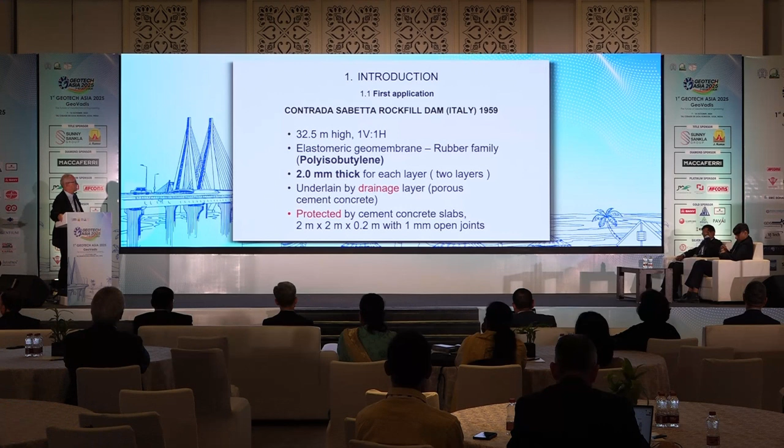As you may know, the first application to a dam was experienced in Italy in 1959 on a rockfill dam 32 meters high, where an elastomeric geomembrane, a polyisobutylene 2 millimeters thick, was applied and protected by cement concrete slabs. This was a very historic application on a quite important slope, 1:1, and after this very historic application, more than 300 dams presently in the world are waterproofed with geomembranes.

Most of them, almost 70%, are embankment dams, the subject of my today's presentation, about 20% on concrete and masonry dams, and the rest are roller compacted concrete dams. These are the statistics from ICOLD, the International Commission on Large Dams.

So I do not spend time on the history of this application. After this very historic application in southern Italy in 1959, a lot of other applications were experienced, like in the United States in 1960, the famous Terzaghi Dam.

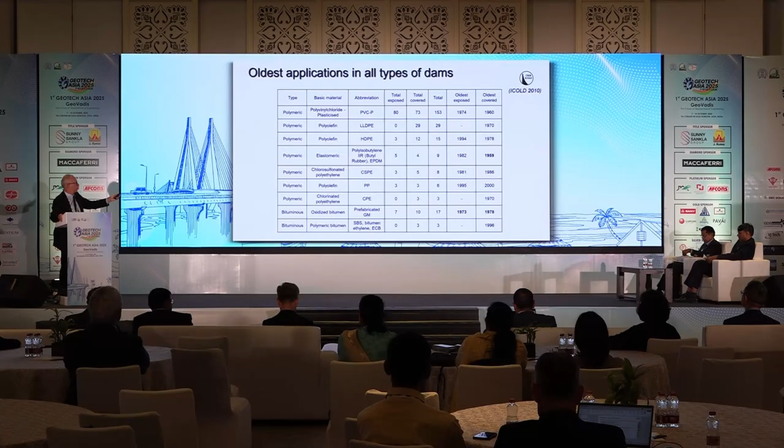Dealing with embankment dams and also reservoirs, my speech today will be only on the upstream slope application, while there are about 10% of applications of geomembranes in dams that are not on the upstream face, but are in the central position in the embankment dams, like in geotechnical engineering zoned embankment dams with a central clay core. This is the same concept, but today I have no time to present this interesting new application on the central location.

The statistics from ICOLD, which are not really updated, date back to about 15 years ago, and most of the applications are now on PVC, polyvinyl chloride geomembrane, which is almost 50%. I will illustrate this in the next slide.

For the new construction, there are two main applications: where the geomembrane is left exposed to atmospheric agents, and another type of application in which the geomembrane is covered or protected by other materials, like in the first case in southern Italy, which was protected by concrete slabs.

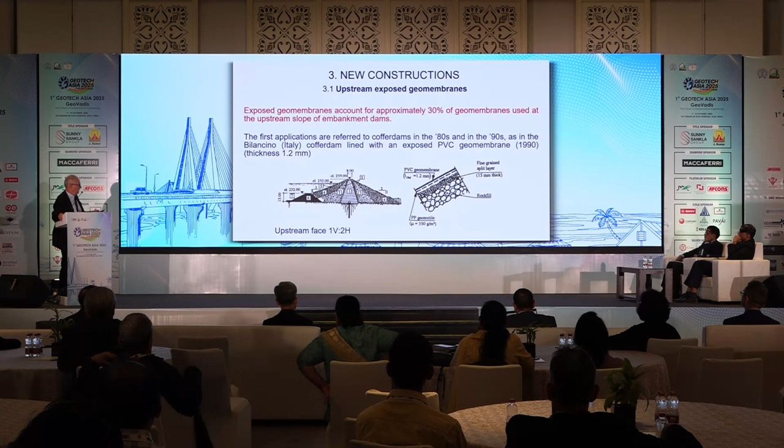This, for instance, is the Bilancino Dam, to protect the city of Florence from flood, in which you could see an embankment dam with a central core and a coffer dam that was protected by a PVC geomembrane.

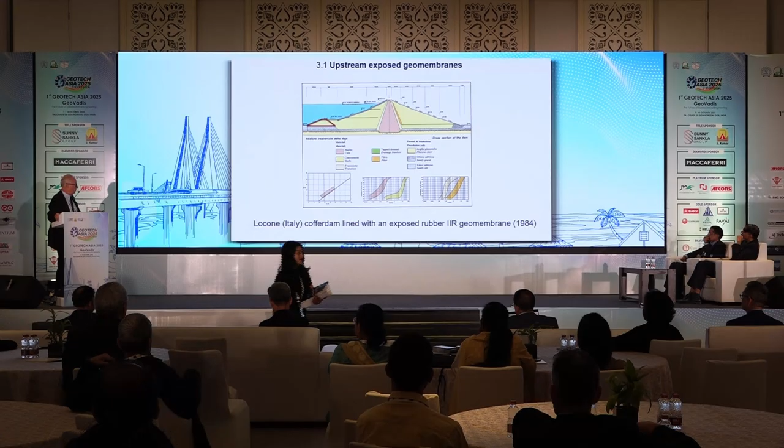More recently, there are a lot of important applications of exposed geomembrane in embankment dams. Here is Cerro Lindo Dam in Peru, less than 20 years ago, with the bituminous geomembrane almost 5 millimeters thick. The dam, about 30 meters high, was applied on a slope of 2 horizontal to 1 vertical.

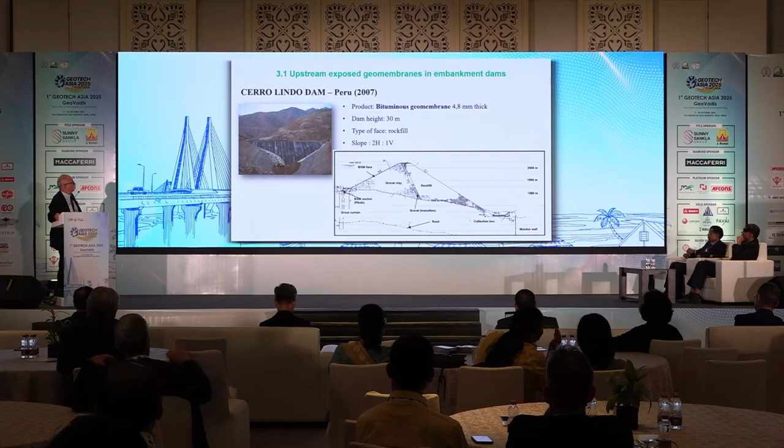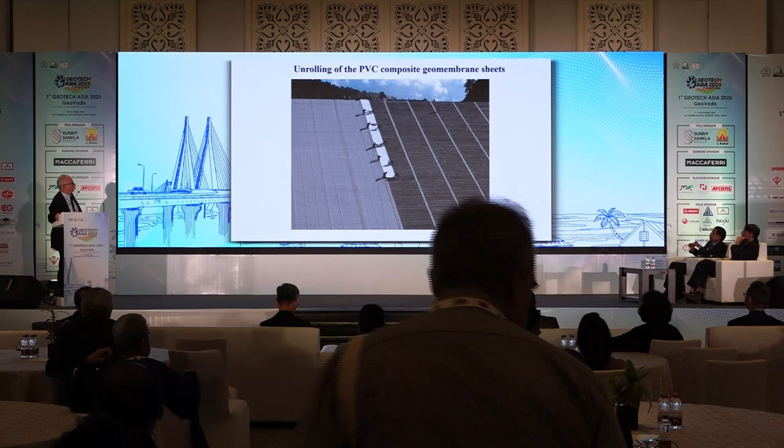This is a case of a reservoir in the United States, in Maryland, in which a bituminous geomembrane more than 5 millimeters thick was applied for a drinking water reservoir. These are the phases of application during installation of the geomembrane itself, and on the right, during service, even in winter time with this exposed geomembrane.

Okay, we have seen some examples, also recent examples, of exposed geomembranes, which cover 30% of applications; 70% of applications are protected, covered geomembrane. So the concept is very simple: to apply concrete elements on top of the geomembrane, or a soil ballast, to protect the geomembrane itself on the upstream side.

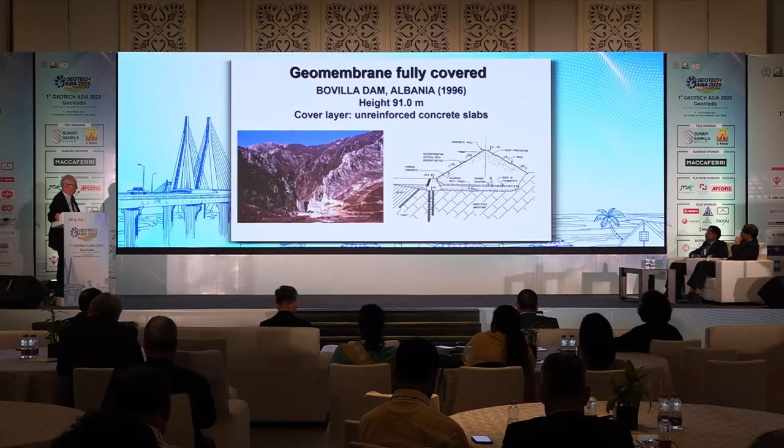This quite important application dates back almost 30 years in Albania, the Bovilla Dam, more than 90 meters high, in which a geomembrane was protected by non-reinforced concrete slabs. You could see here, this resulted in one of the first important applications of this concept.

This is a composite geomembrane, formed in factory, manufactured with a PVC geomembrane 3 millimeters thick, associated in factory with a geotextile of about 700 grams per square meter. The geotextile has a function to protect the geomembrane during application on the support, and in that case the geotextile avoids requiring heavy surface preparation of the support.

This is the application of unreinforced concrete slabs over the composite geomembranes in Albania; an extra layer of polypropylene geotextile, about 800 grams per square meter, was applied. You could see the casting of non-reinforced concrete slabs by an alternating method. It's important to note that this system allows a very fast application, about 1 month for a dam of more than 90-meter elevation.

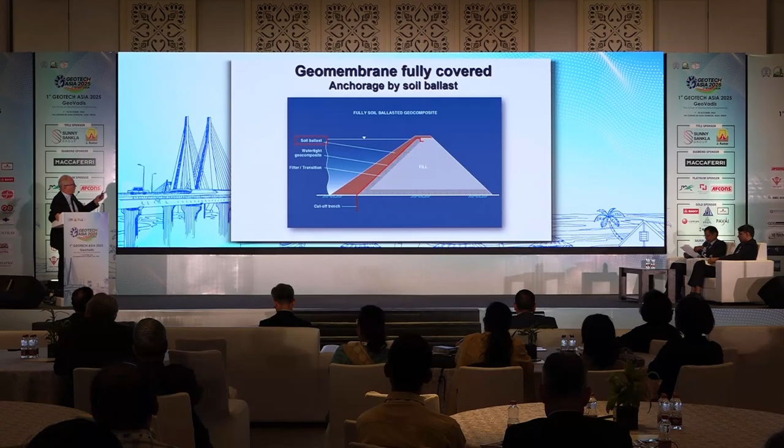A very important historic application was realized by the United States Bureau of Reclamation in the early 80s for this pumping storage reservoir in Colorado, Mount Elbert, in which, for the first time in the United States, a geomembrane was applied, only 0.5 millimeters thick, and protected by a wrap with gravel. This marks an important application because after this reservoir, the installation of the geomembrane marked a turning point also in the United States.

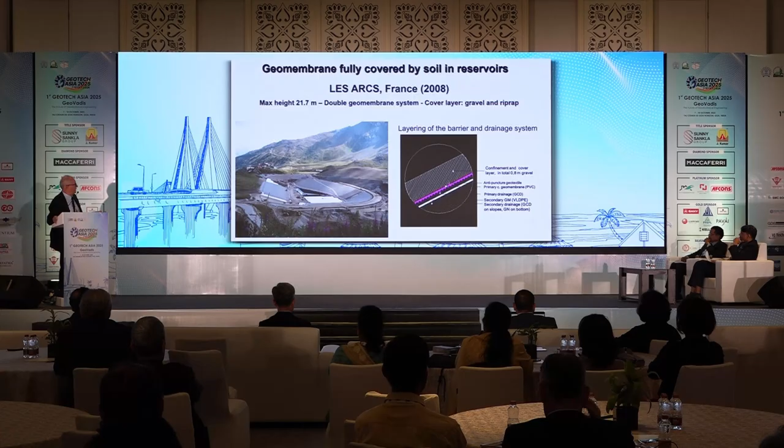A more recent application of a more complex system is this reservoir in France with a double geomembrane system. I will not spend time explaining all the various layers of geosynthetics used in this application in France, just showing the final placement of the gravel cover layer over the entire geosynthetic system.

I have no time today to spend on this in my presentation, but yesterday there was an interesting debate organized by the Federation of International Geoengineering Societies, FedIGS, on the concept of using geotechnical engineering for climate change. In the Alps, and also in other countries, not only in Europe, we have seen in recent years a lot of geosynthetic applications to protect reservoirs used for allocating water for snow-making applications in the Alps.

Finally, concerning the application of geomembranes, not only in new construction but also in rehabilitation, just 3 examples. This is the application of an exposed geomembrane done about 20 years ago on a cement concrete face rockfill dam, particularly in this dam in Norway, where there were important leakage in the concrete face.

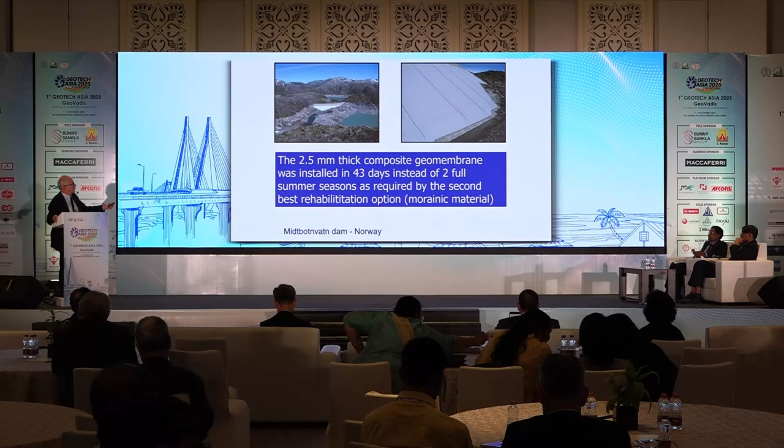A composite geomembrane 2.5 millimeter thick was installed in 1 month and a half, instead of 2 full summer seasons that were required by the second best rehabilitation option using morainic materials. You could see here some particularly attractive photos of the exposed geomembrane in presence of snow and ice during the winter season. But the most important result was that this type of application involved a decrease of the leakage from 440 liters per second to 1.5 liters per second.

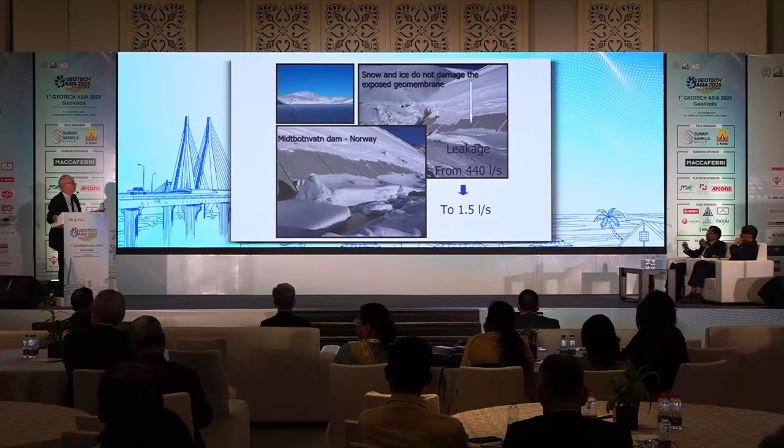The same concept could be applied to bituminous concrete face rockfill dams, and also to stone masonry dams. I'd like to show you a very important application in your country, at Kadamparai in India. It was a masonry dam in which a system involving non-woven geotextile and composite geomembrane, applied 20 years ago, allowed, after the repair, to reduce the leakage from about 40,000 liters per minute to 30 liters per minute.

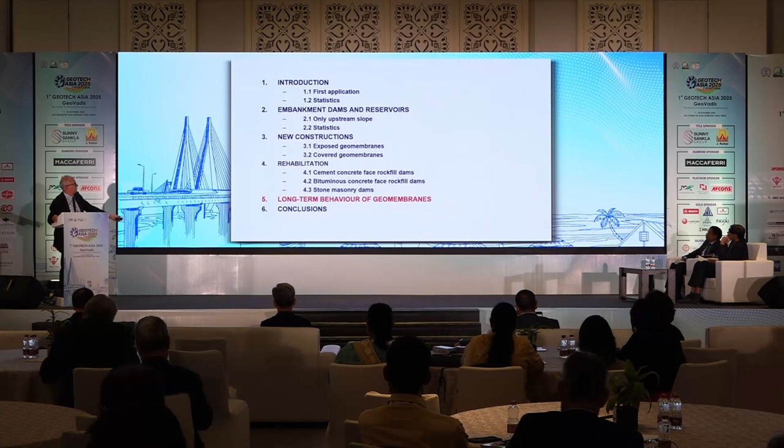So finally, some consideration on long-term behavior of geomembranes. At the Contrada Sabetta rockfill dam, the removal of concrete protective slabs was done in '98, after almost 40 years of application, and we discovered no variation of the mechanical and hydraulic characteristics of these geomembranes after almost 40 years of application.

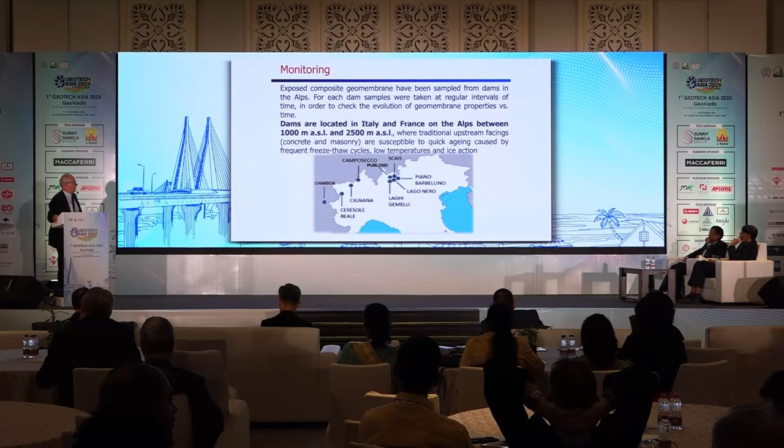A more important research has been done recently by our laboratory on dams located in Italy and France, in the Alps, between 1,000 meter and 2,500 meter elevation. These dams are concrete and masonry dams in which the geomembrane is completely exposed to atmospheric agents.

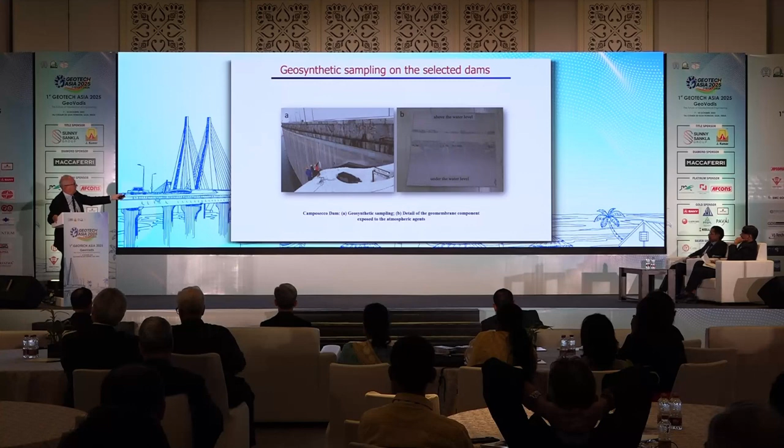You could find the result of this experiment in the written contribution. Of course, our policy is to monitor the dams by visual inspection, but also to take samplings from the dams in order to ascertain their properties over time through a number of tests. The most significant test for this type of dam is the variation of plasticizer content, which could allow us, through some model, to detect the residual life of these geomembrane dams.

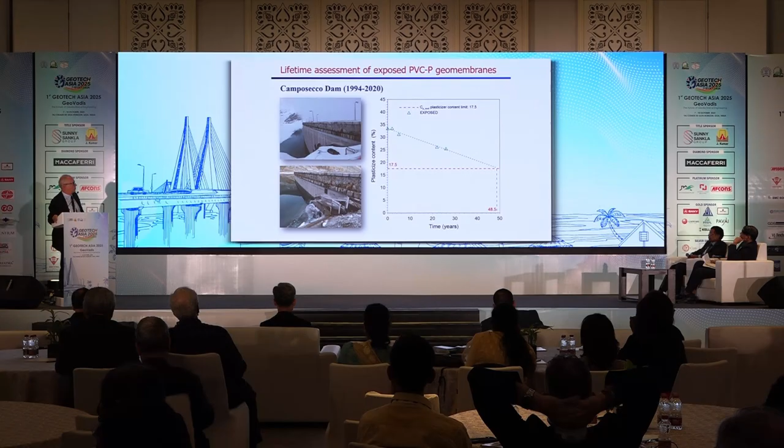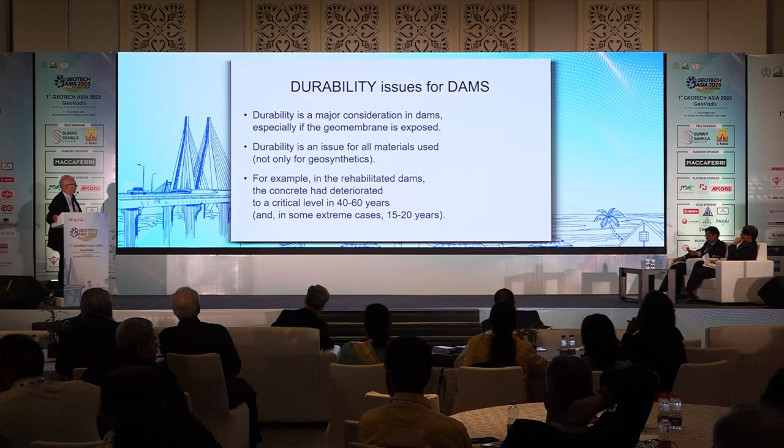So some conclusions: we have seen that most applications of geomembranes are in embankment dams. Durability is a major consideration for these dams, particularly if the geomembranes are exposed. Durability is of course an issue for all materials used in dams, not only for geosynthetics. In dams, unprotected geosynthetics are exposed to harsh conditions, and to ensure durability, particularly in exposed condition, the geosynthetics must be carefully selected and regularly monitored, visually inspected, and to check durability, my suggestion is that the geosynthetic could also be tested periodically.

So I'm available for any questions during the breaks, and thank you very much for your attention, also on behalf of my colleagues.

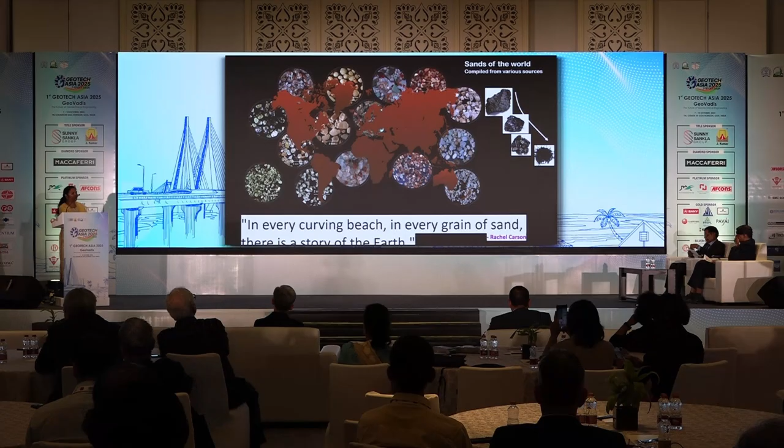In this slide, I am showing you the collection of sand particles from different parts of the world. It's a very beautiful story of the Earth, where there is continuous upcycling and recycling of sand happening. We have these big mountains which get eroded, particles break, they get transported into rivers, and these sediments consolidate, get cemented, and then they are uplifted to again form mountains. At places where we have divergent boundaries, there is continuous lithosphere formation. The igneous rocks are formed from the magma which is coming up, and these again are upcycled into mountains, they get eroded. This is a continuous story of every sand particle that we see on the Earth's face.

You'll be very surprised to know that each sand particle has its own signature shape and size. In the infinite number of sand particles available in different sand beaches and river banks, no single sand particle is alike. That makes us very curious about how these sand particle shapes and sizes affect our macroscopic phenomena like liquefaction.

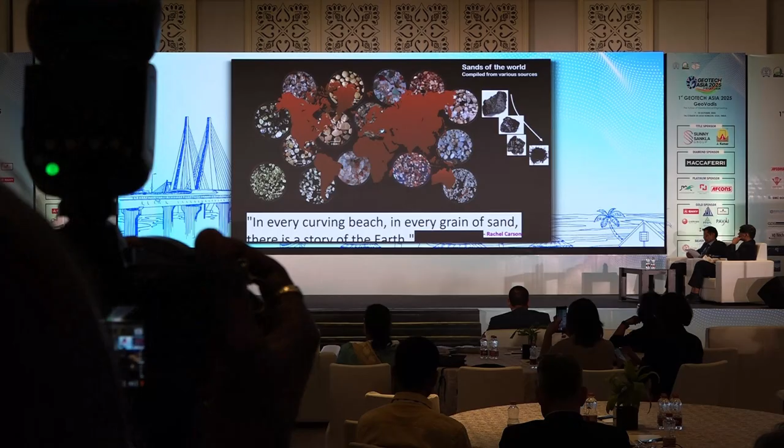As we all know, the particle size and shape and their effects on the shear strength, particle dynamics, density, packing, fabric, overall compressibility, porosity, permeability, these are all well established in literature. But there is no quantification for the effect of particle shape and size on phenomena like liquefaction.

For example, we've been adopting this sieve analysis in our designs. We only talk in qualitative terms. We take sieves which have square openings and pass over soils which do not have a definite shape, and then we only get one-dimensional information. We rely on this shape, and we have no clue of the size and shape of the particles. All our designs only talk about D10, D60 and effective grain size, which has definitely no relation with macroscopic phenomena. So we are making so much of empirical assumptions here, which I am trying to break through this microscopic work.

To put forth some ideas, this is about particle kinematics and how they are affected by the particle shape. In very simple intuitive terms we can understand: if you have rounded particles, their point of contact is one, they can contact at only one point. Whereas if you have an irregular particle, you can have multiple contacts. So this changes the way they interact with each other, whether they roll on each other, they interlock with each other, or they are easy to separate, or it is hard to separate.

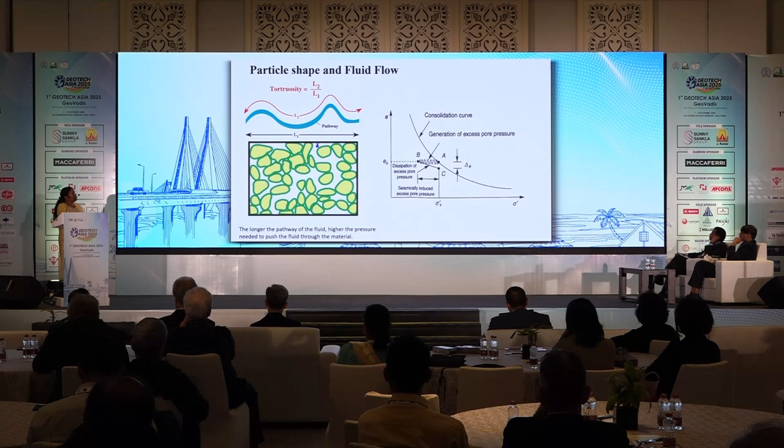If we have a soil particle falling above the CVR line, we call it loose soil. If you subject it to undrained condition, it will reach the critical void ratio line by developing positive pore water pressures. If you subject the same soil to drained shearing, it actually reduces its void ratio because it gets compressed and reaches the critical void ratio.

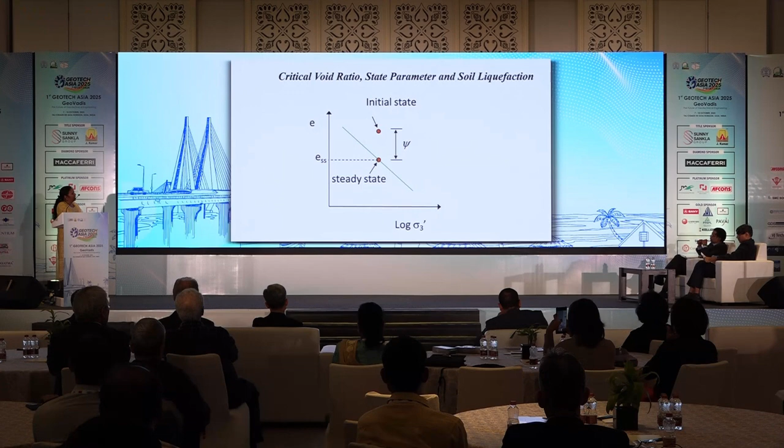Now with this background, we did densification tests on different binary soils, with rounded pebbles and angular gravel particles mixed with fines defined in terms of sand and fine sand. We compacted them and plotted the minimum and maximum void ratio for pebbles and gravels. Very interesting - when you have rounded particles like pebbles, with just 20% fines you reach maximum density, whereas in the case of gravels, which are subangular...

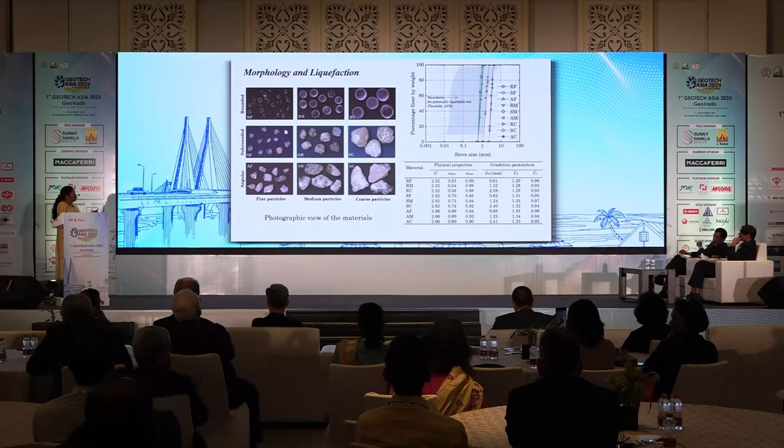For the micro-CT analysis, we fill these soils in acrylic tubes and we can precisely quantify the size and shape of the particles. Further, we also use optical profilometry to understand the roughness.

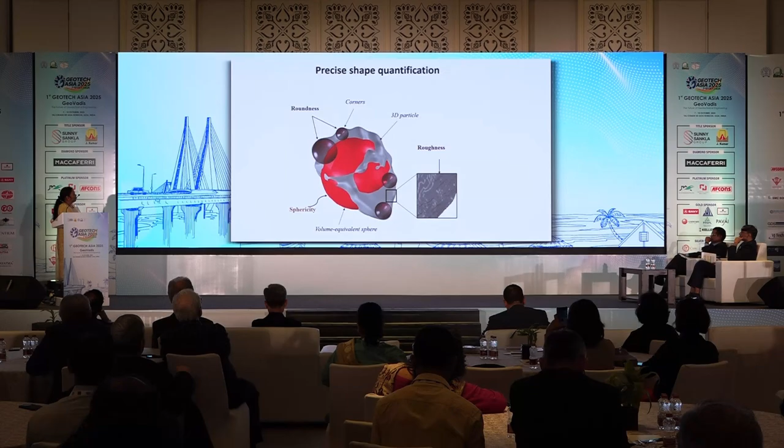Now we do this size and shape quantification on the scanned particles. We move or rotate the particle so that its principal axes remain the main axes X, Y, Z, and then do the volume equivalent sphere generation. We do spherical harmonic analysis to understand the convexity, and then precisely regenerate the particle mathematically so that you can get all the shape parameters from this particle.

I am only explaining this for a single particle. You do this for hundreds of particles together, and then generate the macroscopic or morphological descriptors known as sphericity, angularity, and so on. Now that you have the information, you go for optical profilometry to understand the microscopic parameter, which is roughness.

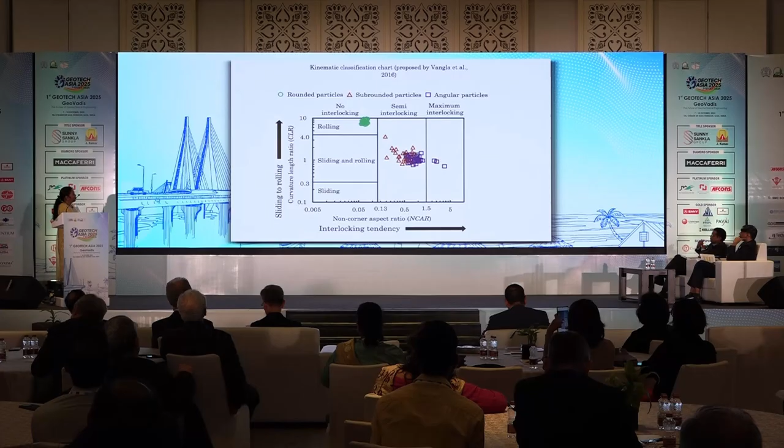Once you quantify these parameters precisely, you put them in a kinematic chart. This chart was developed by my students, Nimisha and Prashant Vangla, where based on size and shape, you can place the particles in no interlocking, semi-interlocking, and maximum interlocking zones. Based on this, you understand the kinematics of particles.

Now, a very interesting aspect of this is that when you separate size and shape, particles of the same shape, irrespective of their size, exhibit the same critical state line and the same phase transformation. Phase transformation is: if you have loose sand and you subject it to shearing, it develops positive pore water pressure, the mean effective stress reduces, and it reaches the critical state line.

It actually contracts and liquefies. If you have a dense sand, it dilates and never liquefies. But if you have a medium dense sand, there is a point at which it moves from contractive style to dilative style, which we call phase transformation.

Irrespective of the grain size, particles of different shape matter. If your particle shape is different, your critical state line is different. So here we understand that compared to grain size effects, grain shape effects rule soil liquefaction.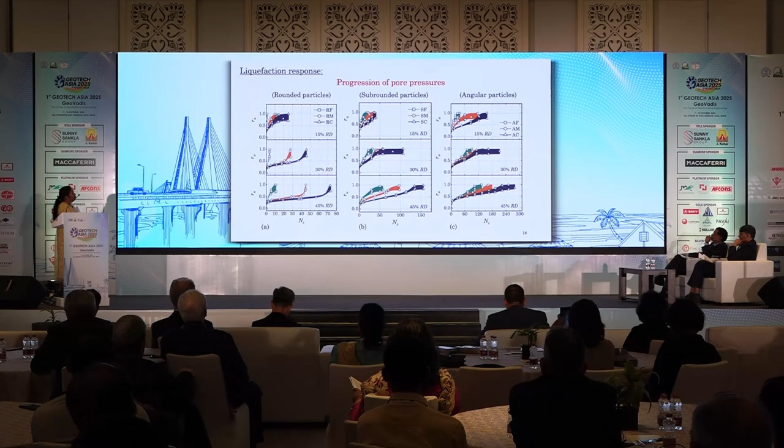A rounded coarse sand liquefies within 25 cycles, whereas angular coarse sand stays up to 150 cycles without getting liquefied. Similarly, the rounded particles quickly move towards zero shear stress state, whereas the angular particles take more time to reach the zero shear stress state.

When you understand the stress strain response, the hysteresis loop gets widened very quickly for the rounded sand. It takes a large number of cyclic stress cycles to induce liquefaction in angular particles.

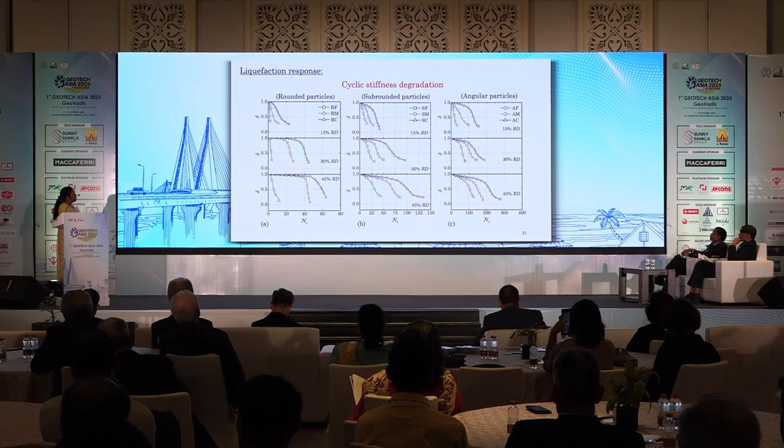The cyclic stress stiffness degradation is also very quick for rounded particles, and it gets delayed in case of angularity. The strain energy needed to cause liquefaction is also very high compared to rounded sand, in angular sand particles.

So if you see the role of grain size and grain shape, which is summarized here, in essence we know that grain shape rules the liquefaction behavior of sands more than grain size, which we have been believing, that smaller fine particles liquefy quickly compared to the bigger sand particles.

Now you combine the grain size and shape effects to ultimately give an understanding of the field level liquefaction resistance, which we call cyclic resistance ratio. So if you plot effective grain size and regularity, which is the average of sphericity and roundness, we can plot the cyclic resistance ratio for different sizes and shapes, which tells us that by knowing the grain size and shape parameters, we can understand the cyclic resistance ratio.

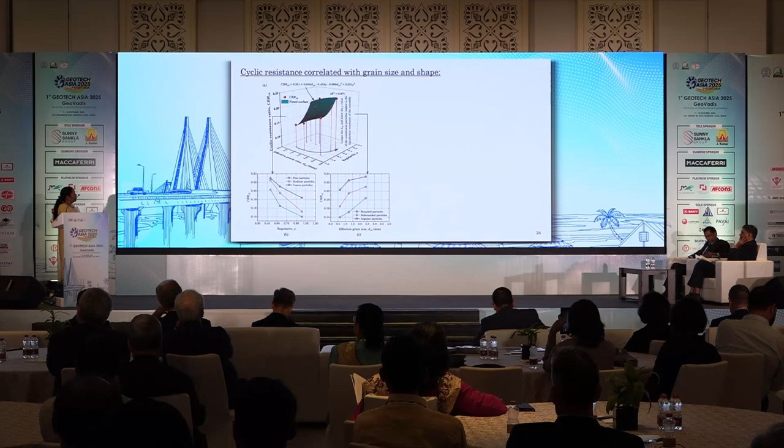Once we have the cyclic resistance ratio, for any given earthquake, the seismic demand is defined in terms of cyclic stress ratio, and the ratio of cyclic resistance ratio to cyclic stress ratio gives you the factor of safety against liquefaction. This is the contribution of grain size and shape to field level liquefaction, which we verified and confirmed.

The reason behind this behavior is very simple. When you have smaller particles, from the cubic packing, which is very loose, to hexagonal packing, which is very dense, moving from this state to that state needs very minimal change in deformation, just a little movement. If your grain size is big, you need a lot more deformation to move from cubic packing to hexagonal packing.

When it comes to grain shape effects, if you have rounded particles, there is a single point of contact, so it's easy for the fluid to separate these particles. In case of irregular particles, the fluid will enter between these grains and separate and dismantle all these contacts. It takes far more energy, and that's why these particles are very resistant to liquefaction.

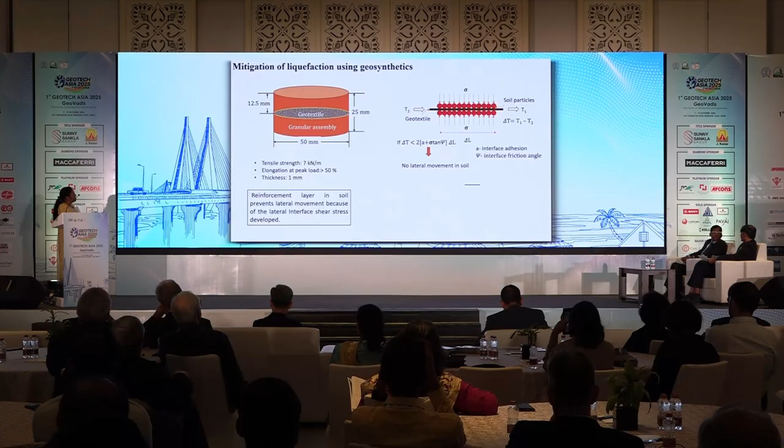Now, about mitigation of liquefaction very quickly, we also try to understand the effect of grain size and shape on liquefaction mitigation. For example, if you put a single geotextile layer between the specimen, exactly at mid-height, and try to understand the liquefaction response of this specimen with different particle sizes and shapes.

What we understood is, when you put the reinforcement, we used a non-woven geotextile which is highly compressible. When you apply the cyclic simple shear, interstitial pressures develop within the thickness of the geotextile, which reduce the pore pressure progression. That is why all reinforced specimens are more resistant to liquefaction, but the resistance increases with grain size and increases more with grain irregularity.

It's very heavily dependent on the grain shape. You can see that the rounded particles could only move from 4 cycles to 9 cycles with an inclusion of one layer of reinforcement, whereas it moved from 76 cycles to 150 cycles with angular particles. So the beneficial effects of reinforcement are more pronounced in case of irregular particles.

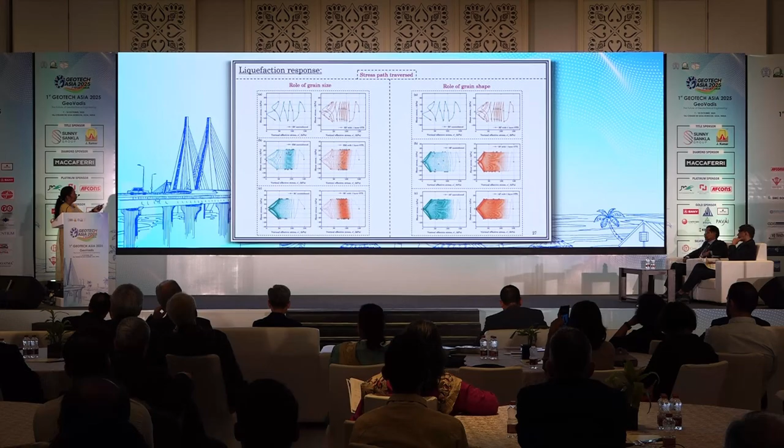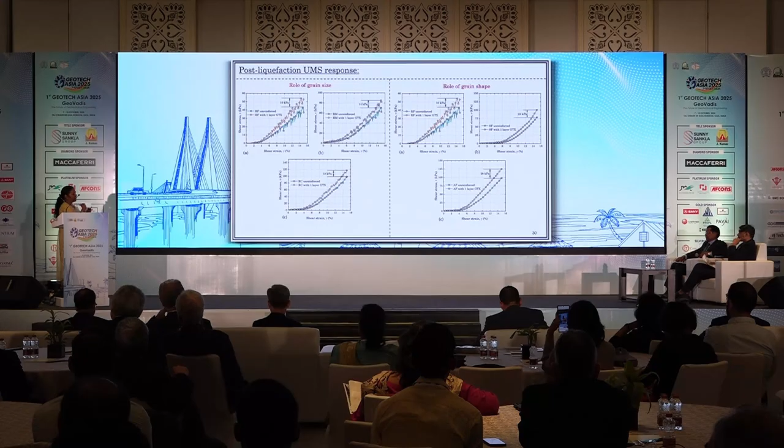The same thing is shown in terms of the role of grain size and shape and the stress path traversed, and the widening of hysteresis loops is very quick in case of rounded particles which are reinforced, compared to angular particles with reinforcement. Similarly, cyclic stiffness degradation is very slow when you have angular particles, and post-liquefaction strength gain is very quick in angular particles compared to rounded particles.

To understand the governing mechanism, we also did the interface shear test, and the interface shear strength can be directly correlated to the increase in liquefaction resistance when you have this layer of geotextile. This summarizes the overall influence of grain size and shape in reinforced sands. You can actually take regularity, angularity, and other parameters like non-corner aspect ratio and curvature.

Modifications were done and tested at a bigger scale, full-scale test as well, where the governing mechanism here is that rounded particles easily roll on the geotextile layer. When you have subangular and angular particles, instead of rolling, they interlock through the material, which creates much better adhesion and interfacial friction, which is the reason for the increase in liquefaction resistance.

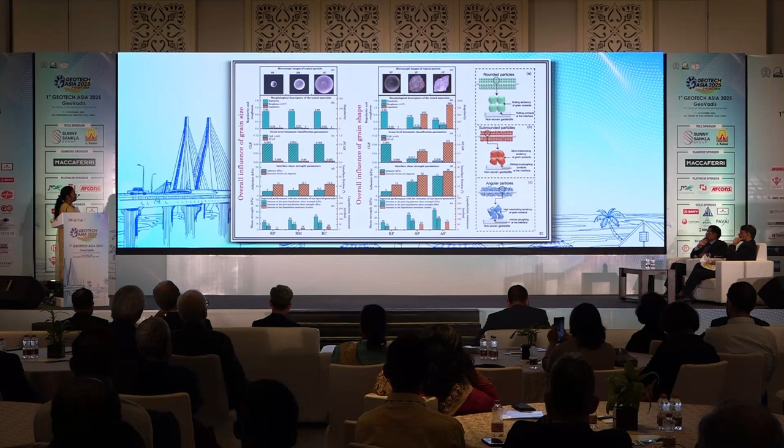Now what is going on in this field in my research is, we are acquiring a big micro-CT which can scan almost 300 mm by 600 mm specimens, and we can do this before cyclic testing in situ. We are also working on 3D printed particles so that we can play around with size and shape and get more clarity on the flow through particles of different shapes.

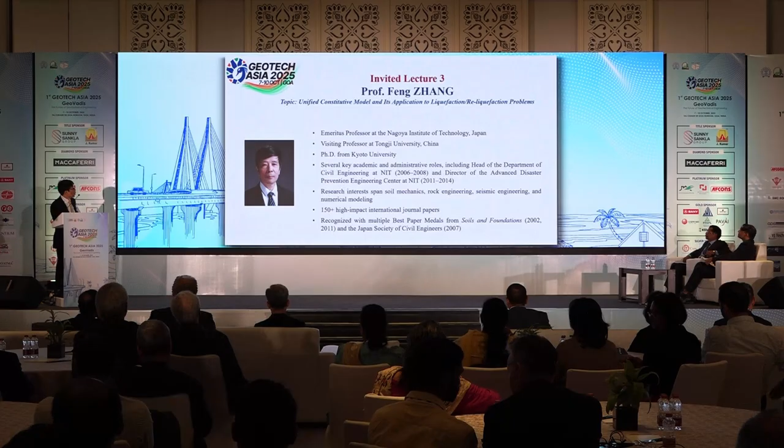So he is also going to speak on the liquefaction aspects. Thank you, Mr. Chairman. The topic of my talk is the unified model and its application to liquefaction. My main focus is on the constitutive model, and I will briefly introduce its applications.

Two parts of my talk: the unified description of soft soil. Sometimes we always consider what is the most influential factor on the mechanical behavior of soil, and three are the most important. One is over-consolidation, or sometimes we call it density.

The second is the structure, where the soil is disturbed, undisturbed, or naturally deposited soil. And the third one is anisotropy - here we mainly consider stress-induced anisotropy.

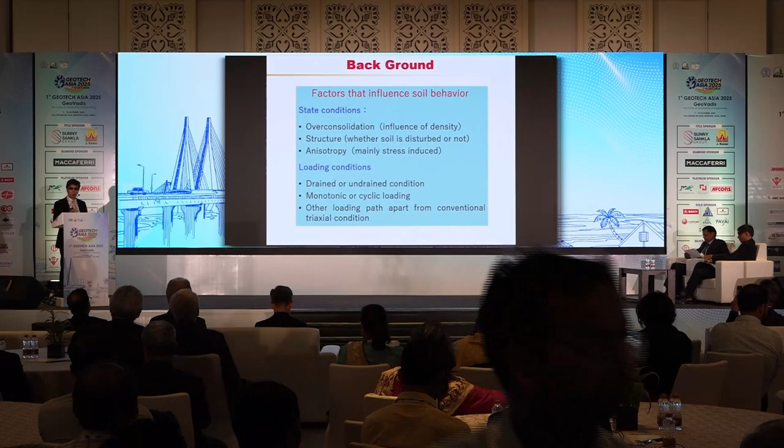The other condition that influences soil behavior is dependent on the external condition, which we call drained or undrained - for soil, undrained or drained is totally different. Monotonic or cyclic loadings are sometimes always contributing, and people used to divide these two different loads for different descriptions. And of course there are other loading paths apart from conventional conditions, so true triaxial conditions, or coaxial and non-coaxial behavior plasticity, etc. But mainly we focus on three major influences.

So if we consider here, I just focus on the sand. For loose sand, or medium dense sand, or dense sand, the soil behavior is quite different.

And also for undrained or drained behavior is also different. The purpose of the research is to describe the sand under different loadings and under different densities, the naturally deposited soil or undisturbed soil, and also the experienced stress history, or what we can say, the stress-induced anisotropy.

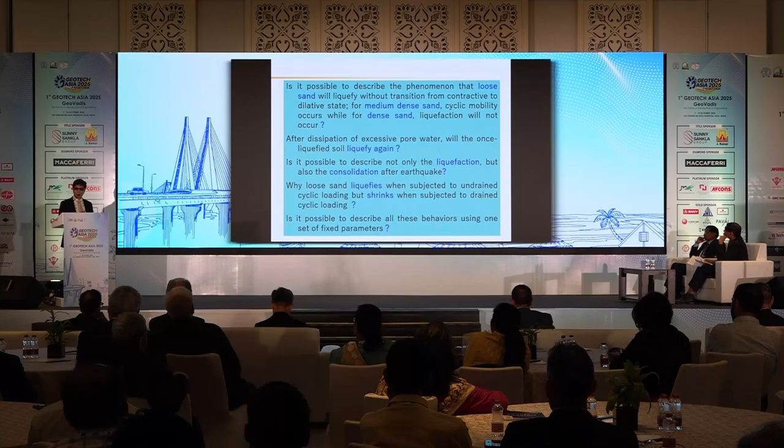So why should we do that? A very simple question is, why would loose sand liquefy? But for dense sand, it doesn't liquefy. And also we observed a very interesting behavior, that during the 2011 Great East Japan earthquake, we find the main shock, the sand didn't liquefy, but the aftershock, much less, did liquefy. Why did such peculiar behavior happen?

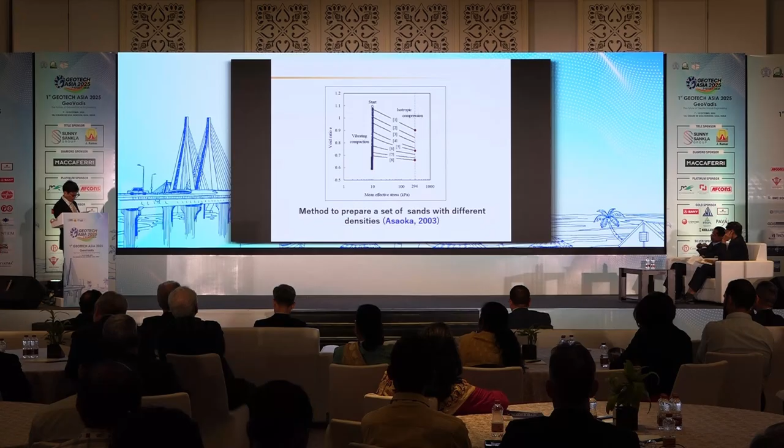So here we prepare a set of sand with different densities. The interesting thing was invented by Professor Asaoka of Nagoya University, using isotropic consolidation and vibration loadings. We start from the same loose sand density, and with different loading paths, we can get a set of sand with different densities. And then we apply the load with undrained conditions and drained conditions.

Here I should emphasize, this is not experimental result, but the numerical result calculated by the constitutive model. I propose we call it the unified model for sand. It is quite easy for you to understand.

For undrained conditions, loose sands show flow liquefaction, static flow liquefaction, phase transition. For dense sand, it looks almost like a linear increase. For very dense sand, this is the effective stress path, and this is the stress-strain relation, and also in the e-log P plot, for undrained conditions, they all move toward and converge to the critical state.

And for drained conditions, dense sand shows strong strain softening and shear dilatancy, but loose sand just shows negative dilation, moving gradually from soft to dense. And also you can find, if we look at sands starting at different points, they finally converge at the critical state to the same point. That means the sand behaves the same way, just under different conditions. However, when you shear them to the critical state, they will move to the same destination. That means the sand under undrained and drained conditions describes a unique state.

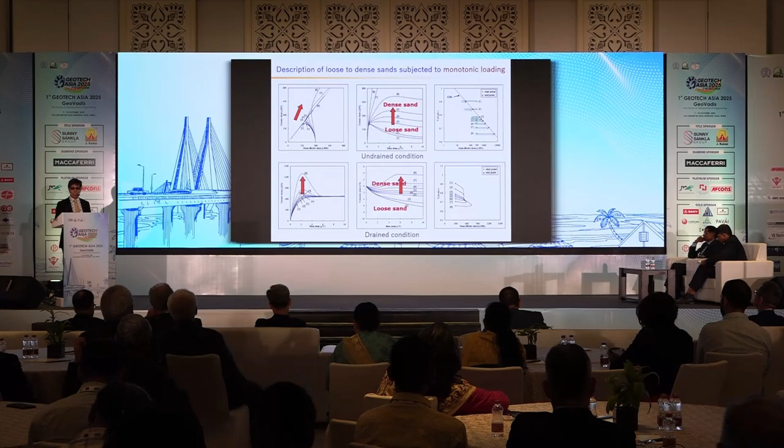But I should emphasize this constitutive model only uses 8 parameters, among which 5 are totally the same as critical state soil Cam-clay models. And the other 3 parameters just control 3 key issues: the evolution of density, the evolution of structure, meaning the decomposition of natural structure, and the stress-induced anisotropy. So you can find, in this way, sand with different densities, subject to different loads under different conditions, can all be modeled using one set of parameters without changing any material values.

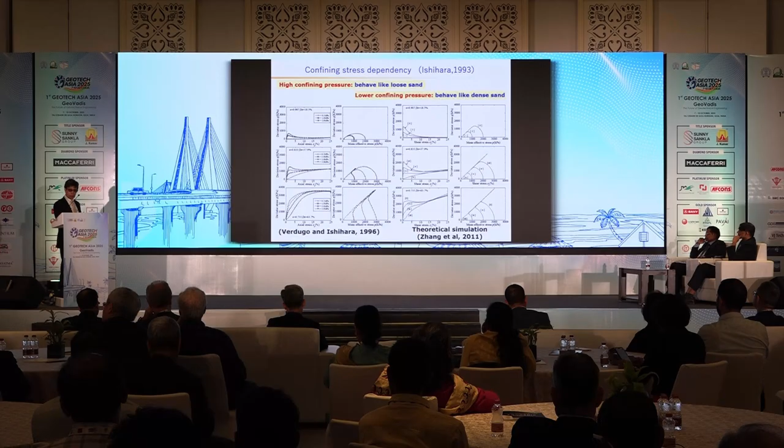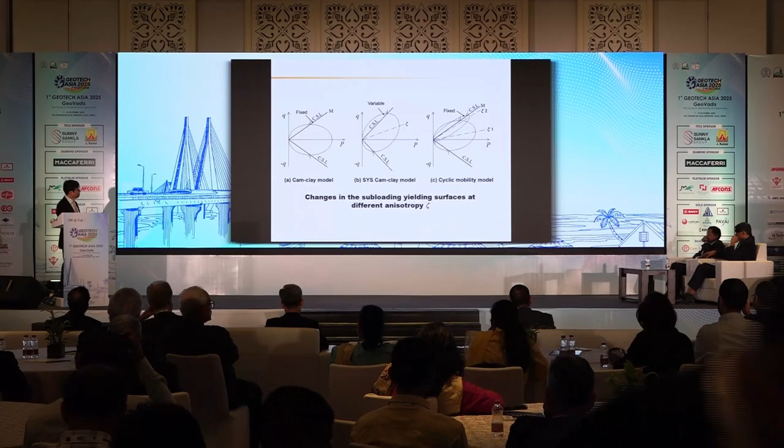I don't have enough time to describe the constitutive model in detail. We use the subloading concept and superloading concept—those familiar with subloading know it is physically the same as the bounding surface concept. This is our constitutive model, using the same concept but very clearly with only 8 parameters, a yielding surface with 3 new evolution equations, and it's a finite deformation scheme.

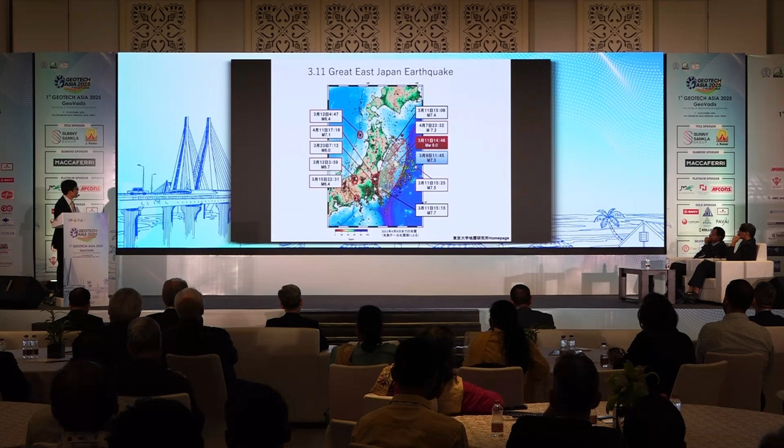With 5 minutes, 2 minutes left, okay, I'll just show you a very interesting behavior since I think I have enough time.

For instance, in the main shock, the liquefaction area is very limited. However, in the second shock, the aftershock, the whole area liquefied—very serious.

I don't have enough time, but this is in 3D. I'll just show you a very interesting pass.

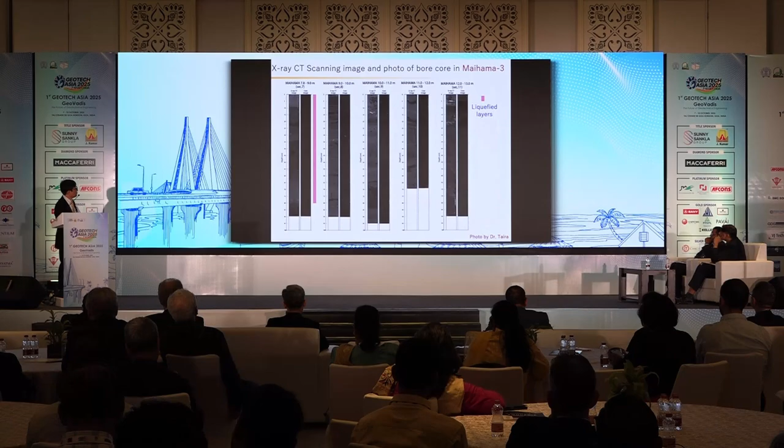This is very interesting because the calculation was conducted for Maihama. We know the detail of the liquefaction because all this data is open on the network, on the website. All people can get the soil profiles and material properties, based on the design method to fix the 8 parameters, and we also have observations of the earthquake waves in 3 dimensions.

We wanted to explain why in the first shock, the main shock, the soil didn't liquefy, but in the second shock it liquefied. We conducted 3 patterns, because the liquefaction and consolidation are considered in uniform ways—we don't need to distinguish monotonic loading from cyclic loading. It just depends on the vibration, the dynamic force, and whether viscosity force should be considered or not. All calculations are run in real time signature without any human intervention.

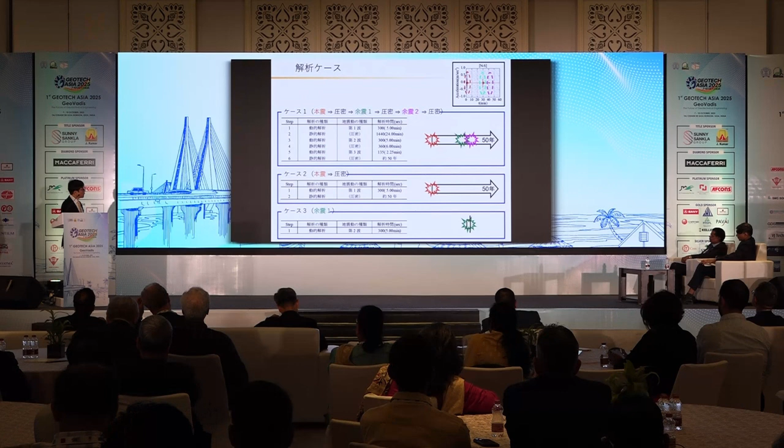Then we consider the main shock in 2 cases: one case is the main shock plus 50 years of consolidation, because after the main shock stops, it will soon undergo a process of consolidation. Then we calculated another case with only the aftershock, without the main shock, and I'll show you the result.

And this is the test result, because all the calculations, we never change the parameters, static or dynamic. Just ask him, the him is the machine, to calculate. Put in one set of parameters and just calculate with the time signature of earthquakes.

And you can see this one, the major shock, 80 gals. The aftershock 25 gals. The earthquake is not enough to make the soil liquid.

However, you can see in this case, the main shock, the first liquefaction, this is the case. The first main shock and aftershock all liquefied. You can see that this is the excess pore water pressure ratio. 1.0 means totally liquefied. And after 5 minutes vibrations, it stopped, but the excess pore water pressure dissipated very slowly.

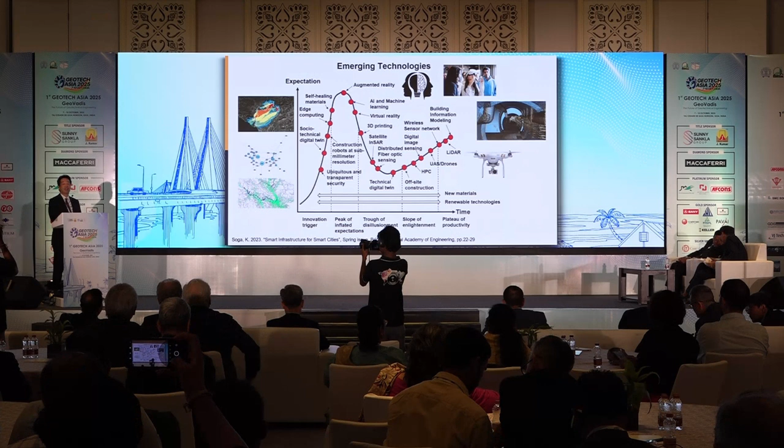This particular graph shows that the vertical axis is expectation, horizontal axis is time, and you can see the evolution of any technology. Initially it has a height that goes up, then it goes down, and then you bring it to the market. You can see that some technologies like LiDAR, wireless sensor networks, digital image have gone to the market now. It took about 10 years to go from here to here. Obviously, the excitement right now is AI and machine learning. And then there are other technologies that you may be working on in your research to bring to reality.

What I want to do today is focus a little bit on distributed fiber optic sensing, because it took me about 10 to 20 years to bring it to this particular location. But hopefully you'll find it interesting.

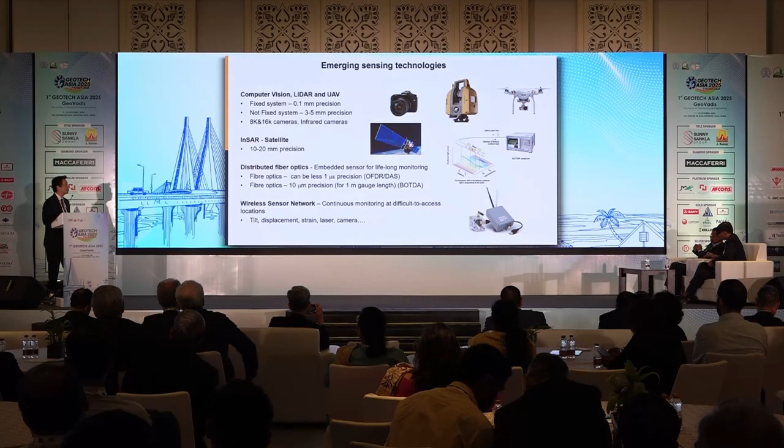Just to start by saying that there are a lot of interesting technologies that can measure movement nowadays, and I'm sure you're using these technologies in your practice. The most important ones are computer vision, LiDAR, and UAVs. What you can do is measure in the order of 0.1 millimeter to 1 millimeter, which is the range that you really want to measure in geotechnical engineering practice.

Satellite is coming. Satellite will have about 10 to 20 millimeter precision. And what I want to do today is give you a little bit more information about distributed fiber optic sensing.

As a geotechnical engineer, civil engineer, we tend to design our infrastructure for 100 years, maybe 75 years, or 120 years. We want to extend the life because many of our infrastructure does exist more than 150 years, but you may have some disruptive events. If you look at many urban cities like Goa, probably Goa 20 years ago was totally different. Now it's like this, but maybe in 20 years it's going to be different.

In other words, when we say aging infrastructure, it's not about material aging. We're changing and making additional loads to our infrastructure, and therefore it changes all the time. So can we make our infrastructure more adaptive compared to rigid design is something we need to think about. In order to do that, you really need to have some sensors. We want to learn what's going on.

So let's imagine a world where future generations no longer have to worry about aging infrastructure. I'm going to give you 3 examples that we've been working on in this particular situation.

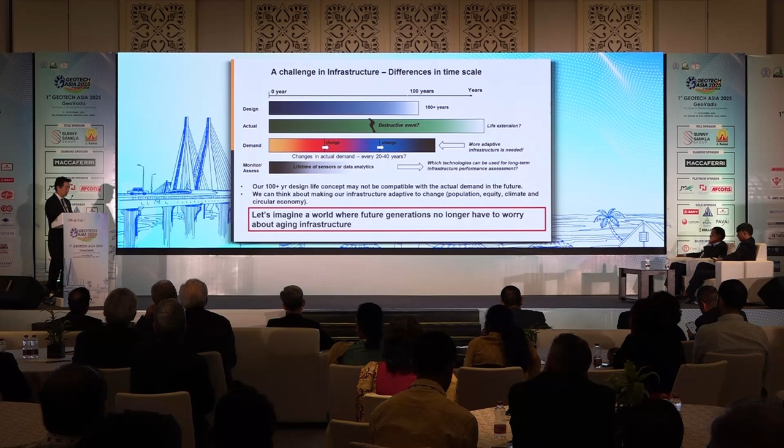One technology I want to introduce you today is distributed fiber optic sensing. It's a standard optical fiber that you use for telecommunication. That means that when you send a digital signal from one side to the other, you can see the light coming out from the other side, and you have a sort of data that comes with the light.

However, if you shoot a light, some light comes back to this particular box, and we know where it came back from because you time it - you shoot a light, and the light coming back early is close to you, and then coming back later on is further away from you. However, what you can do, from light coming from a particular location, I can find out what is the temperature, what is the strain, what are the vibrations at this particular location, or tens of kilometers away.

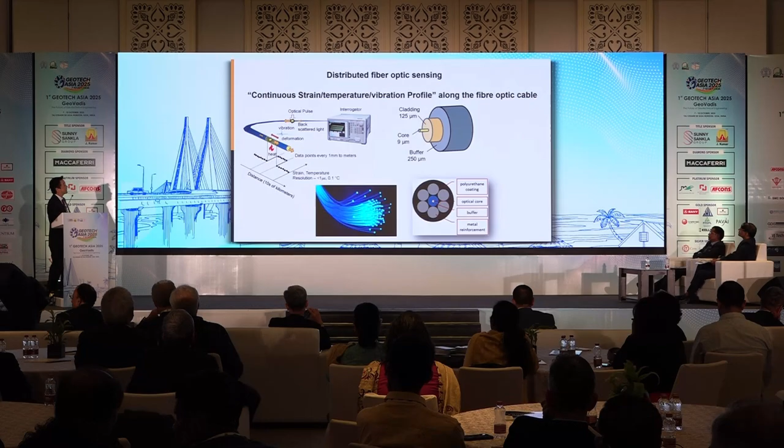The other side of the hill, where we have a water treatment plant, is 107 meters. So every day we bring the water over here, but in order to raise the pressure, every day we pump the water up to these two tanks to keep the pressure high. So when you open a tap, you get your water.

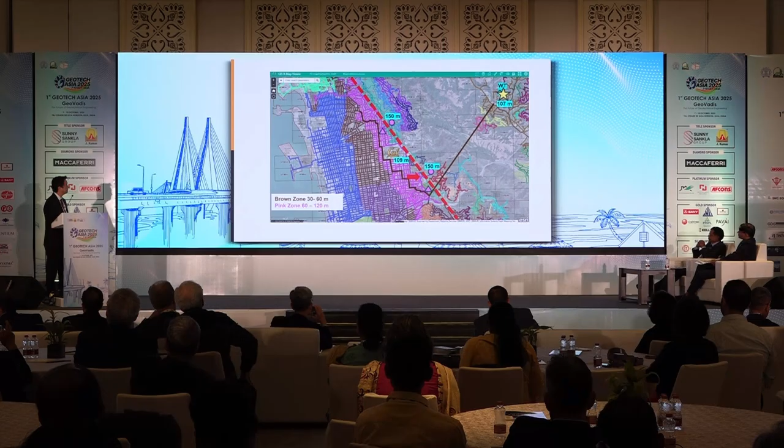Unfortunately, as you'll see over here, Hayward Fault crosses these pipelines that provide water to our pink zone. So what we did is that when they replaced their pipeline 2 years ago, it's a plastic pipe. The diameter of the pipe is 0.91 meter, and then there's another one 0.55 meter. And you can see that this is the roadway where the pipelines were replaced.

And then we attached a fiber optics line on top of the pipe as well as in the trench. These are the fiber optic cables attached or buried in the ground. Now this is the Hayward Fault - this side, your left side moves up, your right side down. Actually this fault is creeping, so every year it moves about 4 millimeters. So there's a 4 millimeter movement which allows this particular pipe to stretch and bend as it goes.

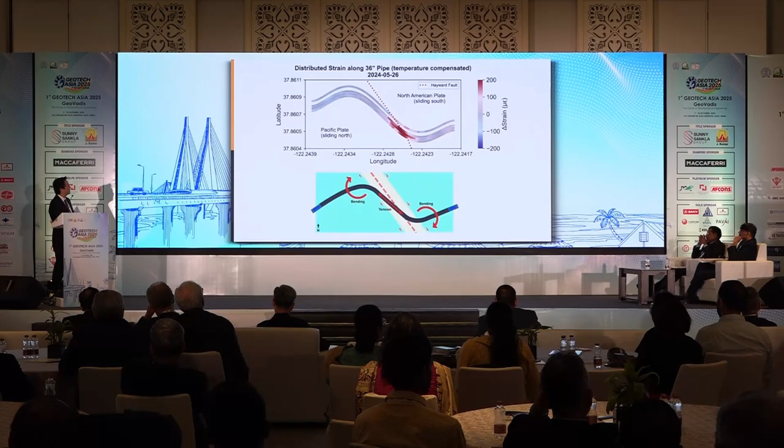This happens around the fault crossing zone. The strain is about 100 microstrain—very, very small, but you can see it, and you can see the mechanism. If you have 3 cables, you can start to see tension, which is stretching because this side and the other side are moving relative to each other. There's tension, and then a little bit more bending happening at the curvature points.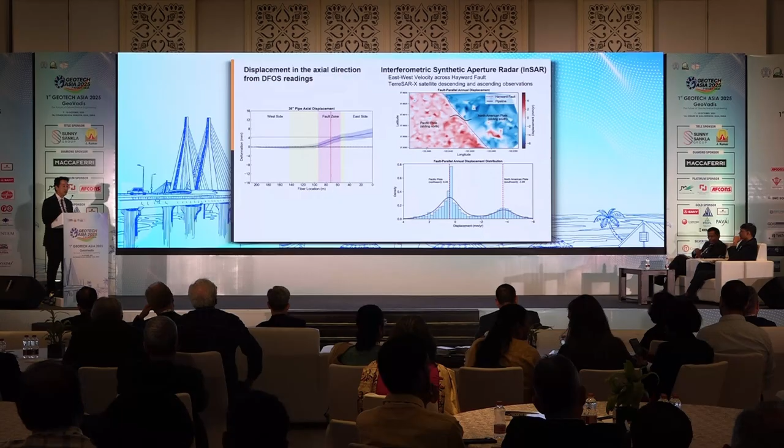This one, after 18 months, shifted about 4 millimeters. We also have satellite monitoring data. One side, the red zone, is moving up, while the other side, the blue zone, is moving down. If you look at the difference in movement, it's about 4 millimeters. So the satellite data, from many tens of years of observation, matches the data I showed you using fiber optics. Fascinating, isn't it?

So we started thinking, rather than having a point strain measurement, let's try to measure distributed strain to assess our infrastructure. We have a project with the California Energy Commission to look at different types of technology, and tomorrow or the day after, my colleague Professor Dimitrios Zekkos will probably show more about UAVs. We work together to look at pipeline distributed strain, and using that we understand the mechanism and update parameters for better prediction.

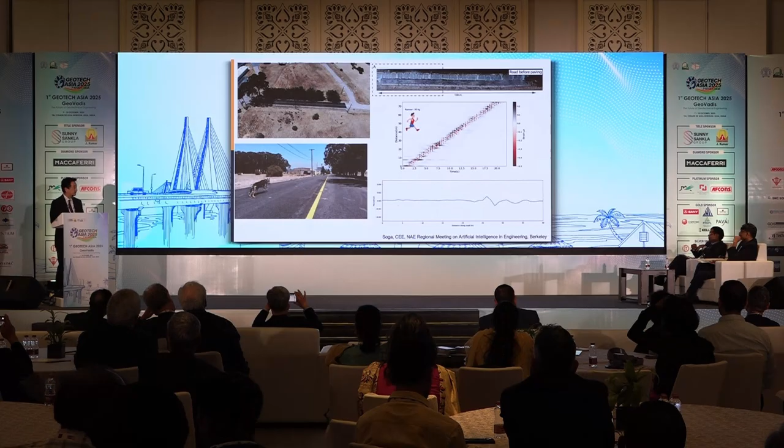Every road already has fiber optics for telecommunication because of fiber optic communication. We have a site where we borrow one of the lines already in the ground, running from the city of Richmond to Berkeley to Oakland. This length is about 25 kilometers of fiber already embedded for communication, but we're using it to detect anything happening along that road.

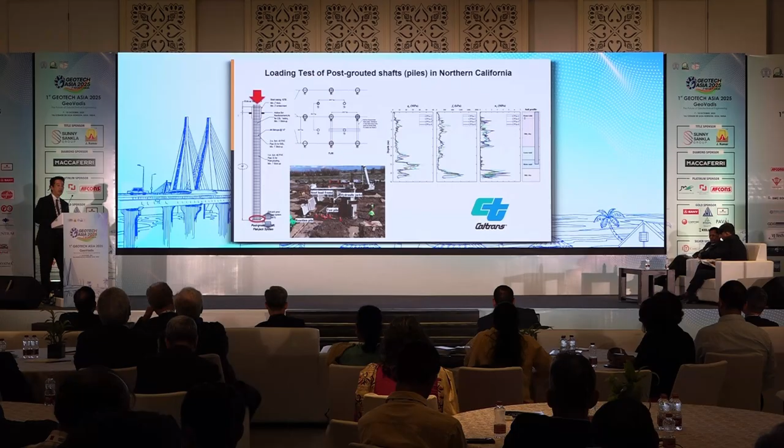We have 4 different tests, vertically loaded piles, and we attach fiber to these 4 piles. The piles were over here, so you can see the pile loading. We attach the fiber at 4 different locations to measure strain at 4 different locations of the pile in the vertically loaded condition. This is the load displacement profile, load versus displacement at the top.

What we do is that as you apply the load from the top, you measure how much strain is developing as you apply the load. Obviously, a larger strain will develop at the top and decreases due to shaft friction.

Okay, so let's look at the data. So we have 4 different lines, but I'll go back again. We also have vibrating wire strain gauges at different locations, which may be a typical thing that you do.

So this is the first data set. I apply the load, and the vertical axis is the distance from the top, and the horizontal is strain. You can see that the vibrating wire strain gauge shows larger strain at the top and decreases to some value as the load goes down to the bottom of the shaft.

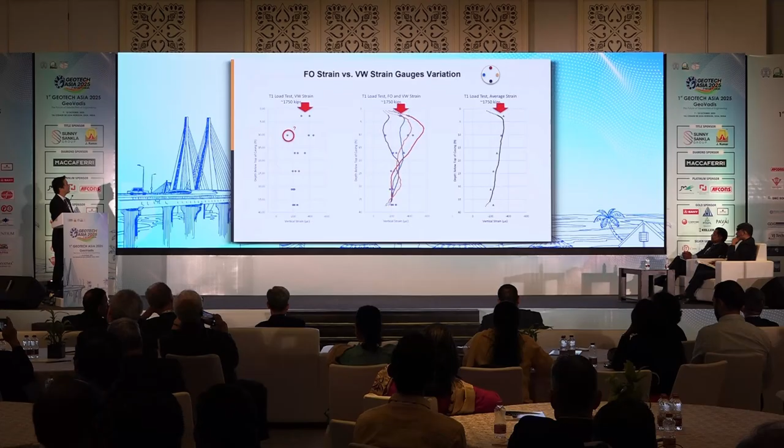If I take the average of the data, which you see at the end of the bar, you can see a very nice shaft friction developing as strain decreases with depth. So on average it looks good, but the actual behavior is bending.

So the question is, what is the effect of this bending? I have to load it vertically, but sometimes because the piles are not homogeneous, it bends a little bit and you see anomalous behavior.

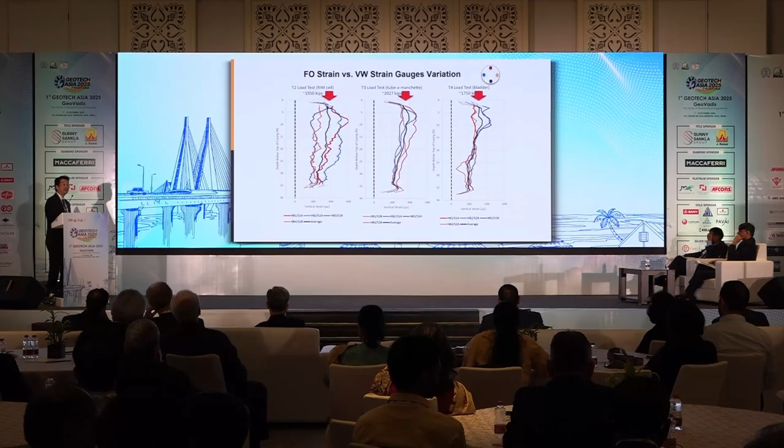So that's the real performance. If you know you have force and strain, then what you can do is integrate twice to get the shape of the pile, how it's bending as you apply your load.

Actually, when you look at the data and record very carefully, the pile is not vertically loaded, and there was some eccentricity in the loading application. In other words, even though you have a pile head and pile tip, because the pile is not always vertically down, as you excavate it can go a little bit tilted, and therefore you have an eccentricity even though you try to make a vertical pile.

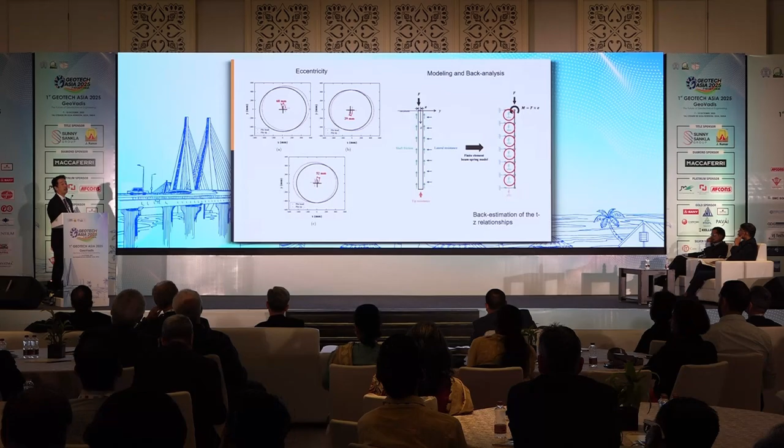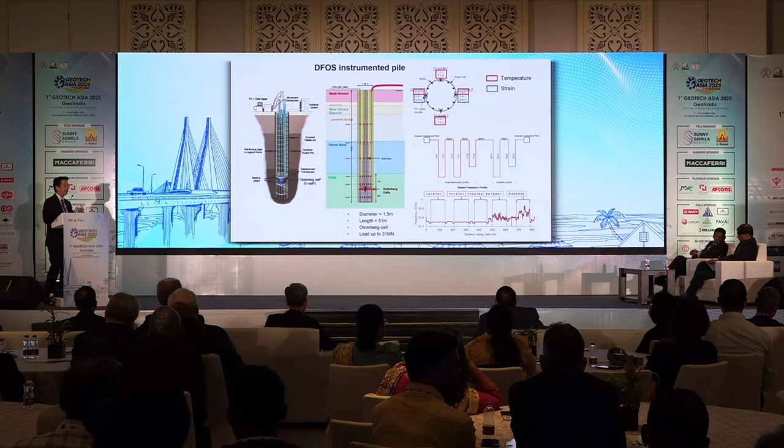Again, we attached fiber optics at 4 different locations, along with a temperature cable that measures the temperature all the way down to the bottom of the pile. You attach the optical fiber to the cage and fill in the concrete, and you splice the cable so that when you shoot a light through it, you get both temperature and strain data in one measurement. You take a reading every time you want to record data.

When you attach the cable, as you lower the cage, the cable rolls down together with the cage, and then you attach it. The most important thing is making sure your contractor or construction crew is happy with the process and that you don't delay construction, so you figure out the best way to attach the cables to avoid any disturbance from the construction point of view.

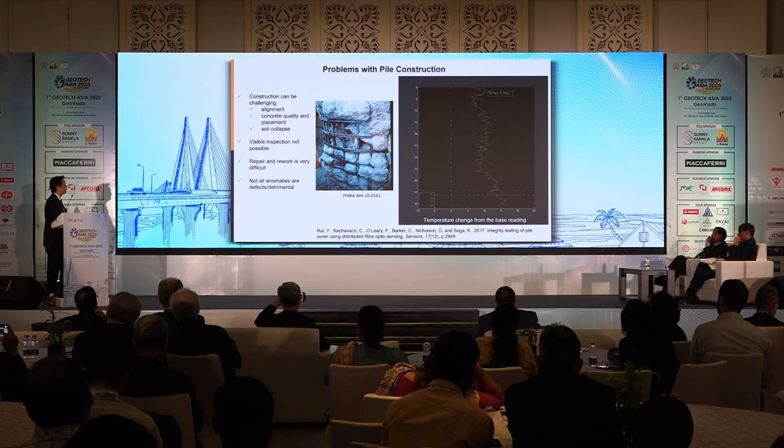You can measure the temperature change during the curing of the concrete, recording the temperature as you go along. This allows us to measure how the concrete cures over time after installation of the pile, and from this we can see at every point along the pile how the temperature rises and decreases due to hydration.

Then you can run an FE analysis of how the heat dissipates into the ground. The uncertainty involves the radius of the pile, since a larger radius dissipates heat differently than a short radius. You can calibrate this to derive the shape of the pile, a process called thermal integrity testing, and this is the pile shape derived from the temperature data we collected.

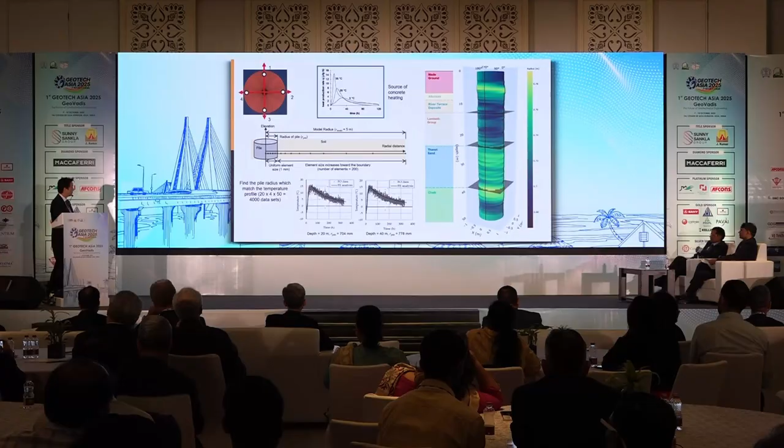What I want to show you is actually the dimension I showed you earlier, you see the pile going up and down, increasing and decreasing with radius. But this is the shape - it's not really random, and also it's a smooth transition from larger radius to smaller radius. That's the shape of the pile.

After that, what you can do is apply a load. So this is an O-cell that you can apply a load to, so you can see the load distribution and how strain changes as you apply the load.

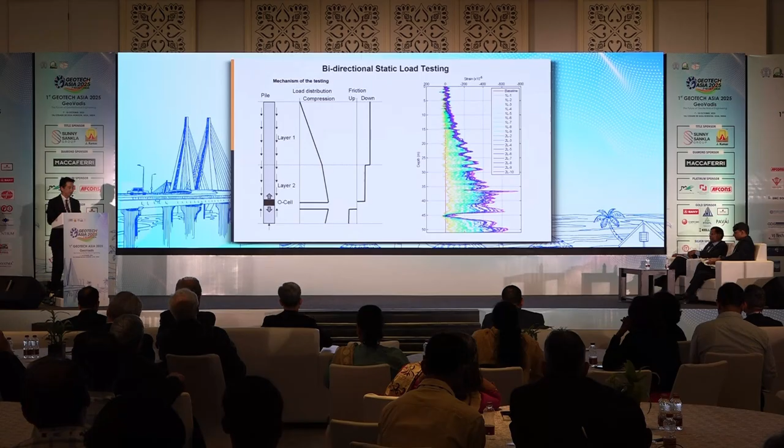And this is the strain data. You see the strain data over here with the fiber optics, and you can see a zigzag of the data. You may not like it, but it may be similar to the strain gauge - I'll come back to this later on.

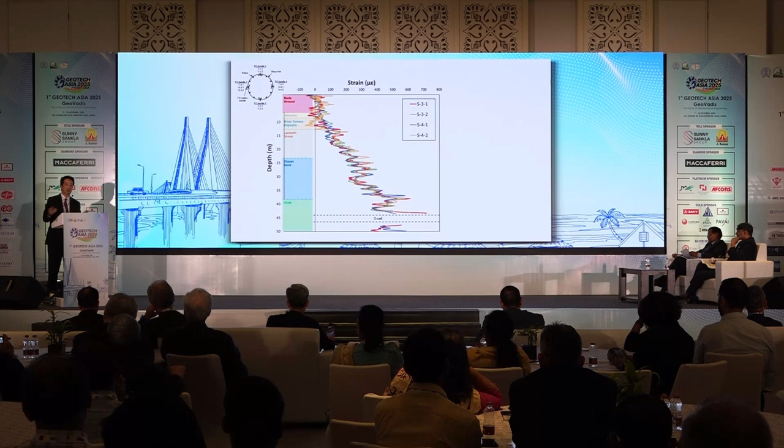I have 4 cables in this particular pile. If I plot the first cable, it looks like this. The second cable looks like this. The third cable looks like this. And the fourth cable looks like this. Every strain location, exact zone location, shows an increase or decrease in a very uniform way. In other words, this up and down is not due to an instrumentation issue - it's about the real performance of the pile, or the anomalies that you have in your pile.

And you can see up and down exactly the same location, and then you can derive your TZ relation. So this is the shaft resistance and displacement.

So the point here is that if you put your fiber optics in your pile, you can look at quality control, you can look at real-world performance, you can look at future-proofing, and perhaps you can use it when you want to reuse your pile.

I just want to finish off this particular slide by showing that, remember I showed you the up and downs in your pile radius from the thermal measurements. So this is the thermally derived radius, and you see up and downs. And then this is the strain data - when you mechanically load, you see up and down. And the point is that when you see down, it goes up. In other words, if your radius decreases, your stiffness decreases, so your strain increases.

In other words, you see independent measurements of the radius by the temperature data correspond nicely to the mechanical performance of your pile. What you're trying to see in the up and down radius is reflected in your strain.

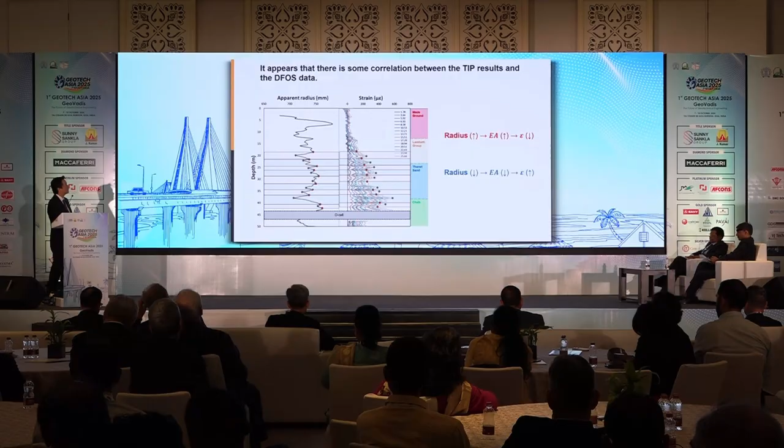So in summary, what I wanted to show you today is that there are a lot of opportunities in geotechnical engineering using this particular technology. Why don't we start using it for quality control, maintenance, resilience against hazards, reuse in particular, and then trying to look at what we call a new generation of observational method.